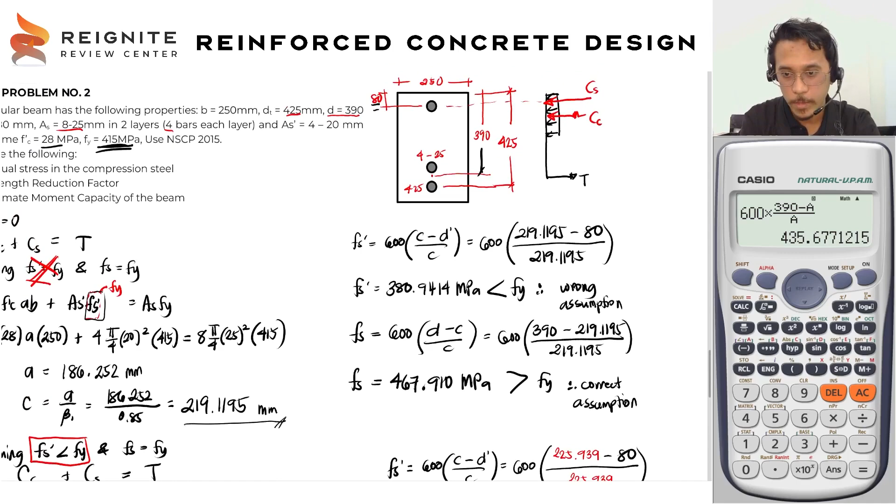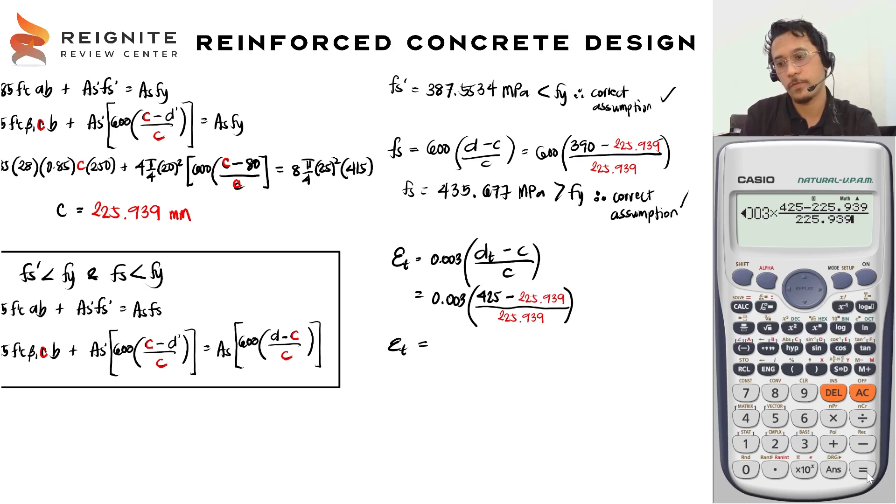So 425 minus natin sa value ng C. Then divide natin to dun sa 225.939. And then pa-compute ng strain. So we have here 2.643, or 0.002643.

So guys, you have to check muna yung Fy over Es natin kasi baka compression control siya. So Fy natin is 415. Divide natin sa 200,000. Check natin, class. So we have here 0.00207.

Fy over Es, so 0.002643 ay mas malaki dun sa Fy over Es pero mas malaki yung 0.005. Okay? So therefore, this is in transition zone. And kung transition zone yan, we need to get the value of our phi.

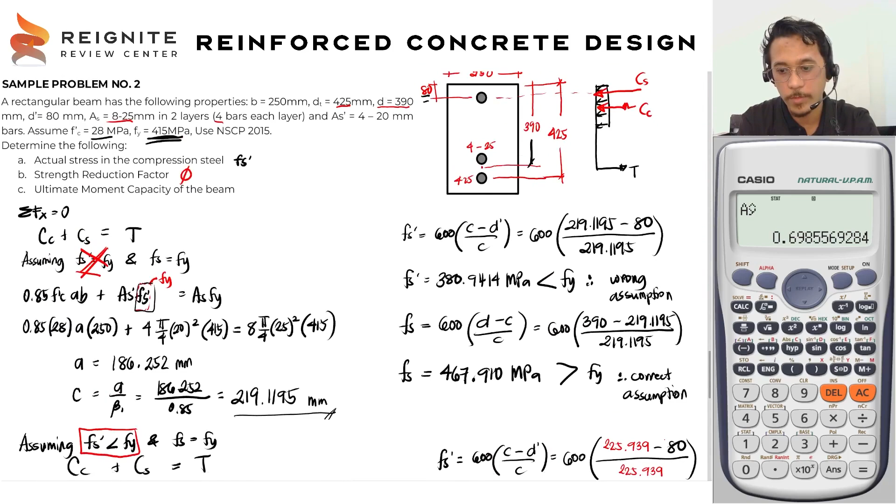Now, for the last, compute daw yung ultimate moment capacity of the beam. So, kunin ulit natin yung MN1 and MN2. Lagyan natin dito yung MN1. So, 0.85 F prime of C times A times B times D minus A over 2. Lagay lang natin dito, class. 28 ito. Yung A natin, wala pa pala dito. So, yung A natin, compute natin dito. So, this is beta 1 times C. So, 0.85 times 225.939.

So, we have here 192.0482. Yan. So, dito, lalagay ko lang to. Then, yung ating B, class, ay 250. Then, yung ating D ay 390. Bawasan natin ng 192.0482, divide natin siya, class, sa 2. Okay? Then, divide nyo, class, ito sa 1 million, 10 to the 6.

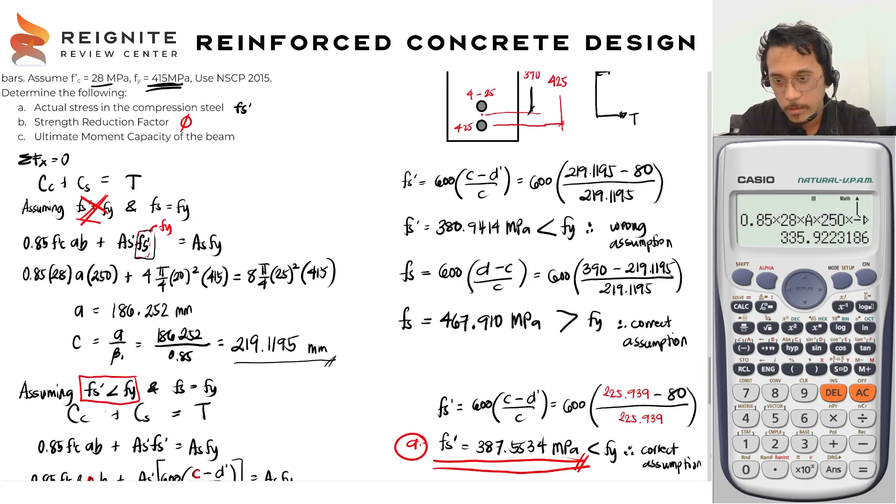And then, i-multiply natin siya sa D minus D prime. So, 390 minus yung D prime natin na 80. Then, divide natin sa 10 to the 6. Check natin kung tama. 390 yung D natin. Ang D prime ay 80. Tama tayo. So, here, pa-compute, class, yung MN2.

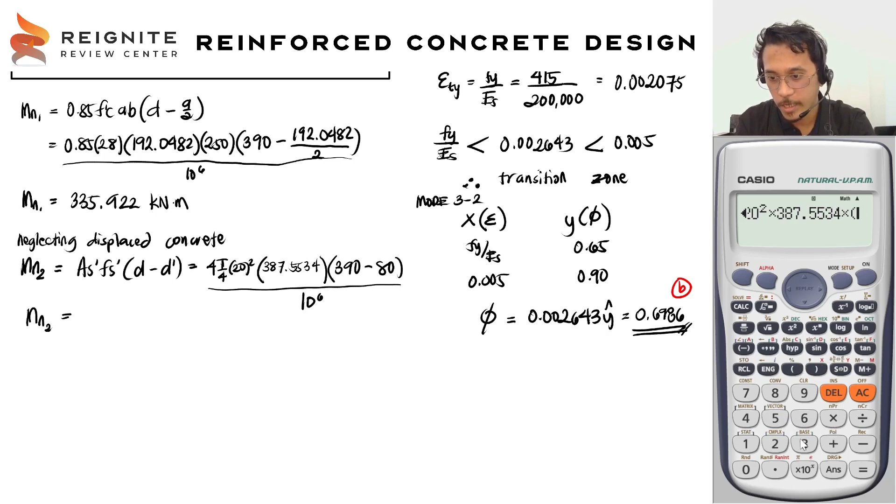So, 4 times pi over 4 times natin sa 20 squared. Then, times natin sa 387.5534. Times natin sa 390 minus 80. Divide natin sa 1 million. So, 150.974. So, ito yung ating value ng MN2.

So, to calculate the ultimate moment capacity, phi MN, phi times MN1 plus MN2. So, substitute lang natin yung 0.6986. Then, add lang natin yung 335.922. Add natin yung 150.974.

So, for our value of ultimate moment capacity, add lang natin yung kanina. So, i-add ko na lang to sa 335.922. Then, ta-times natin siya sa 0.6986. So, we have here 340.1458.